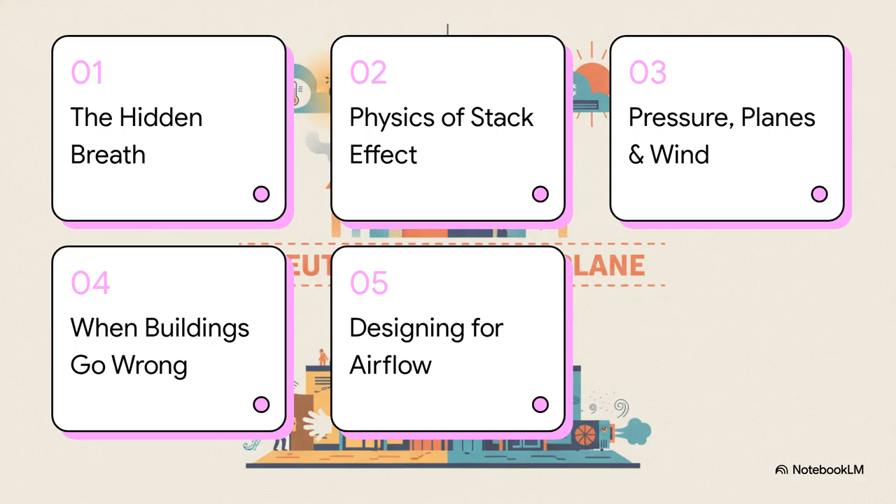So, here's what we're going to do. We are going to pull back the curtain on this whole thing. We'll start with a mystery, then we'll break down the actual physics, look at what happens when it all goes wrong, and then, my favorite part, see how engineers and architects get really clever to design around it. All right, first things first. Let's put a name to this invisible force and figure out what it's all about.

It's called the stack effect, and honestly, the other name for it, the chimney effect, is just perfect, because that's exactly what's happening. Tall buildings with all those elevator shafts and stairwells, they basically act like giant chimneys, creating this constant, surprisingly powerful flow of air. So, how does a skyscraper actually turn into a chimney? The physics are, believe it or not, pretty simple. But the effects, they are huge.

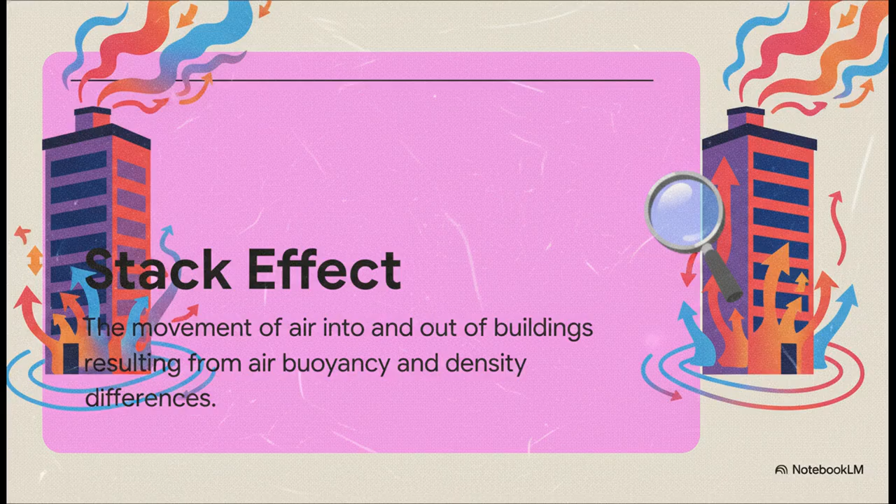Okay, so what it really boils down to is one word, buoyancy. It's all driven by the difference in air density between the warm air inside and the air outside, and that usually comes down to temperature. We all know hot air is less dense, it wants to rise. Cold air is denser, so it wants to sink. That's it. That's the core principle.

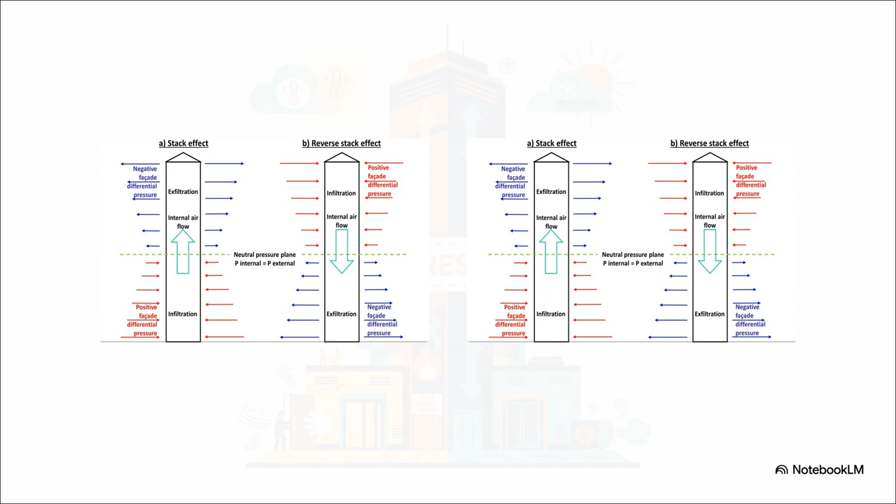Now look at the right, summertime. The whole process flips. The cool, air-conditioned indoor air is now denser than the hot air outside, so it sinks, pushes out of the lower floors, and pulls hot air in from the top. It's the exact same physics, just running in reverse.

Let's dig a little deeper now. How do these air movements build up into real, measurable forces? To get that, we need to talk about pressure, and a really crucial concept for understanding this whole process. And that concept is the neutral pressure plane, or NPL. The easiest way to think about this is as the building's balancing point.

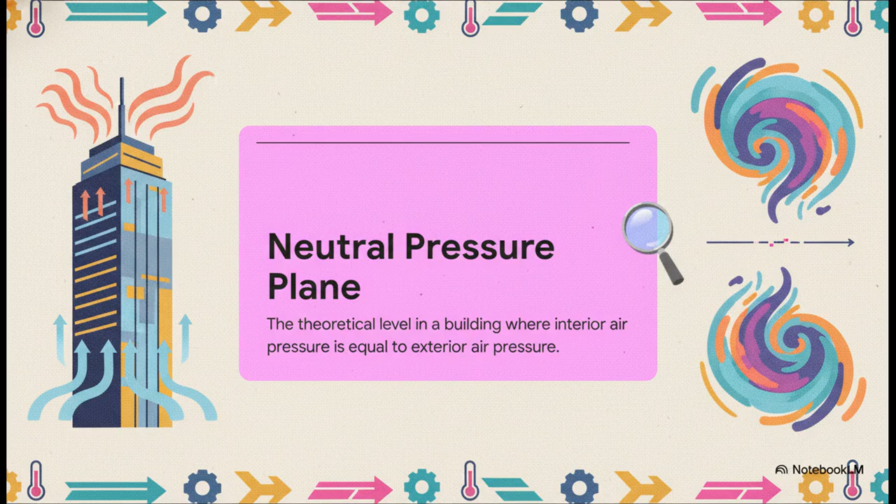It's this one theoretical level, somewhere in the middle of the building, where the inside air pressure and the outside air pressure are exactly the same. There's no push, no pull. It's neutral. And everything that happens with the stack effect happens above or below this invisible line.

And this diagram just lays it out perfectly. In winter, everything happening below that neutral pressure plane is what we call infiltration. Cold outside air is being sucked in. And everything above that line is exfiltration. Warm inside air is being pushed out. This simple idea, this dividing line, is the key to understanding all the problems and all the solutions that we're about to get into.

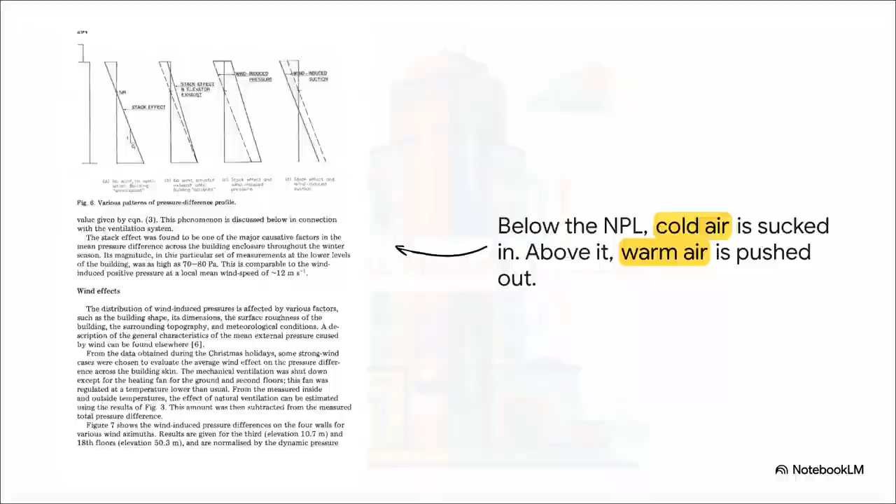So just how strong are we talking? Well, some research on a 20-story building found pressure differences as high as 70 to 80 pascals on those lower floors. Now that number might not mean much, but get this. That's about the same pressure as a steady wind blowing at almost 30 miles per hour. And remember, this isn't the wind outside. This is a force the building is creating all by itself, just from the temperature difference. It's pretty amazing.

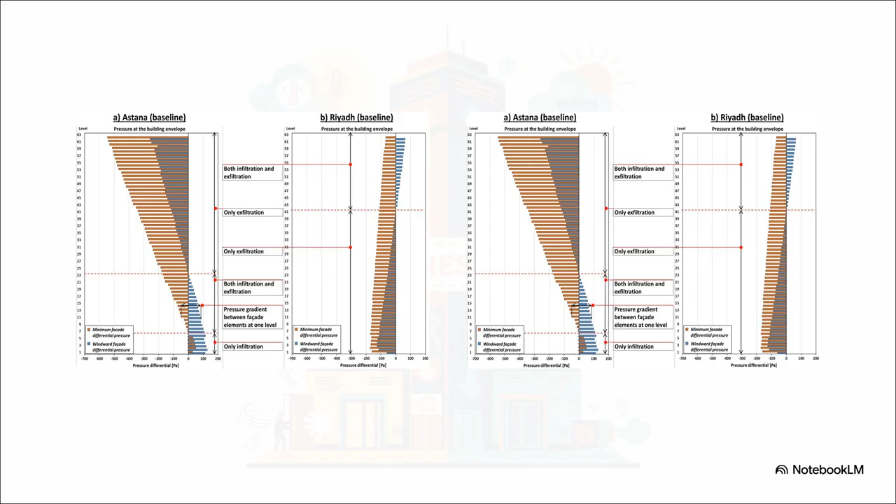Okay, we've got the physics down. But what happens in the real world when this powerful, invisible force isn't managed properly? What happens when a building's breath turns into a gale? The problems range from just plain annoying to seriously dangerous. You get those malfunctioning doors that are hard to open, those constant drafts, weird whistling noises from air screaming through tiny gaps. But then it gets much more serious.

This uncontrolled airflow can spread smoke, smells, and contaminants all through a building. It makes your heating and cooling systems work way overtime, which means huge energy bills. And maybe worst of all, it can completely undermine a building's fire safety plan. And that point about fire safety, that is absolutely critical.

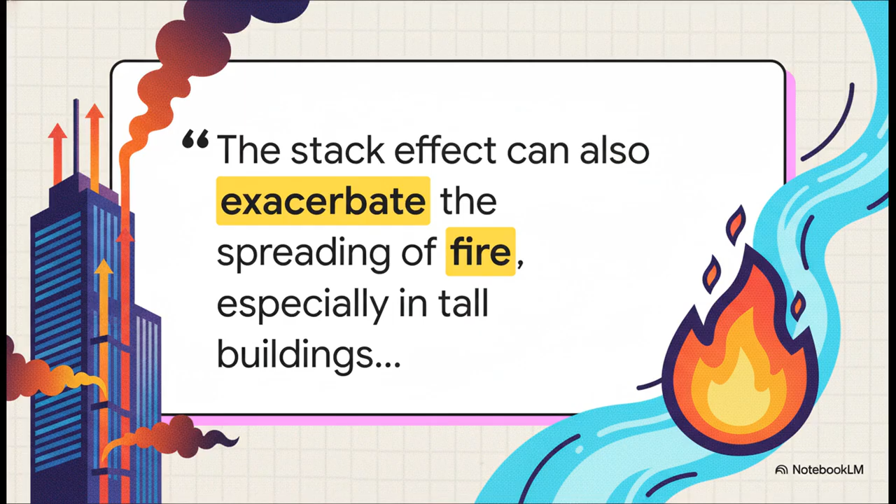So you might be thinking, how on earth do you fight back against basic physics? Well, the good news is architects and engineers have a whole toolbox full of clever strategies to tame a building's breath and get it back under control. And it really is all about control. Revolving doors and vestibules, they're basically airlocks to prevent those huge gusts of air.

Making the building's outer skin, its envelope, as airtight as possible is absolutely fundamental. Then, on the inside, you break up that giant chimney by compartmentalizing shafts and stairwells. And you can even use modern HVAC systems to fight fire with fire, so to speak, by strategically pressurizing certain areas to counteract the stack effect.

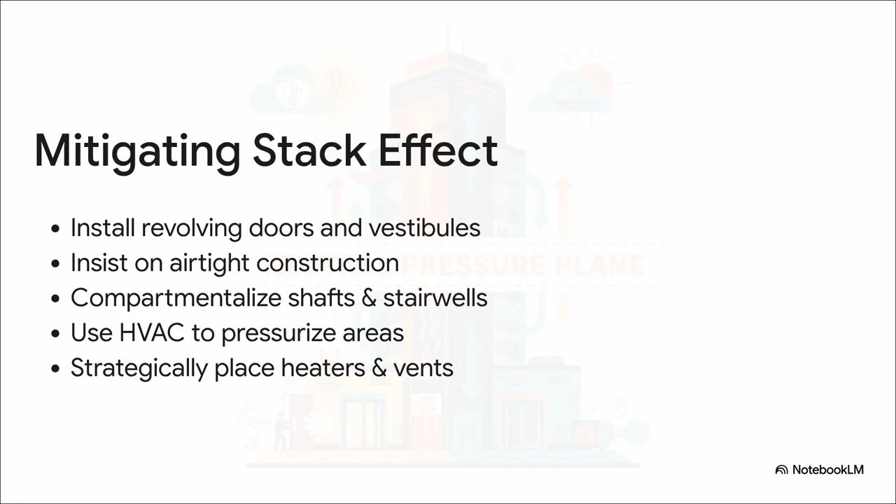You know, what this all really does is it forces you to see buildings in a completely new way. They aren't just these static, lifeless objects made of steel and glass. They're dynamic systems. They're constantly in this push and pull with the outside world, inhaling and exhaling with the changing seasons.

So the next time you feel that draft or you have to lean into a heavy lobby door, you'll know what's really happening. It's not just the wind, it's the building itself taking a deep breath. It kind of makes you wonder, doesn't it? What other huge, invisible forces are out there shaping the world we've built all around us?